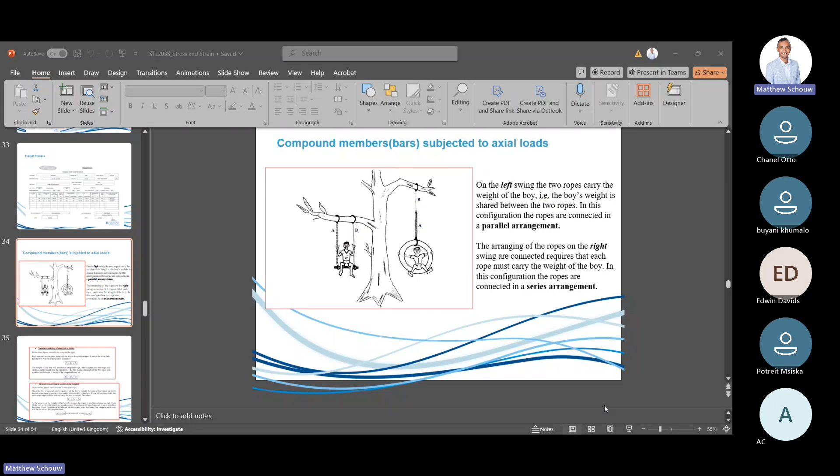There are two types of arrangement, and please, right, these arrangements are of utmost importance. It happens throughout the syllabus of N5 and N6 in different variations. So understanding this parallel and series arrangement is of critical importance, especially when it comes to the strength of materials.

Nevertheless, if you look at the boy on the left there, right, there's two ropes on either end of the boy carrying the boy's weight. And basically with those two ropes, the boy's weight is shared amongst the two. Okay, that is what we deem a parallel arrangement.

Okay, so that's the first thing. Now I'll ask you, what change of length do you think this arrangement will experience in terms of the change of length? Will the change of length differ, or will it be the same?

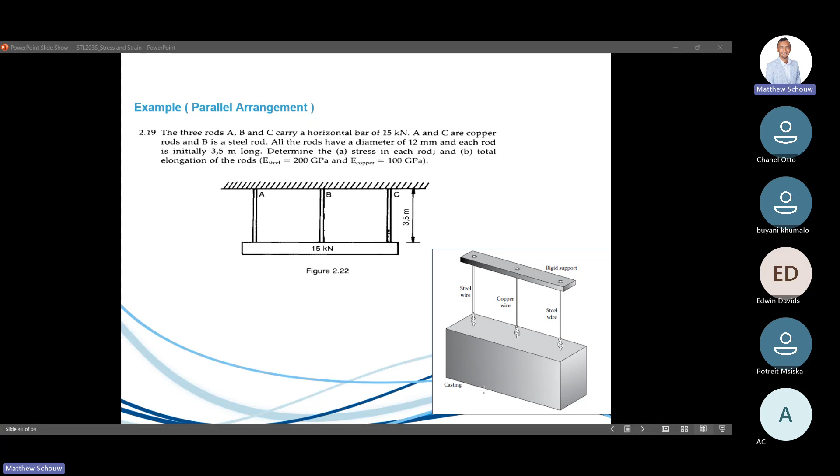I think it would be the same. Yes, and the reason being - I agree with you - if they are all maybe of the same length and they are carrying this, supporting the same load, so they shouldn't be different. Perfect, that's good enough, especially the term of the same length.

So that being said, right, I'm gonna go back to the formula for parallel arrangement - just bear with me going back and forth. You'll notice that they will say here that FA plus FB equals FT. Essentially what it means is that rope and that rope will equal the total force of the boy, which is going down, so FT would actually be the weight of the boy.

And then what you find is that the change of length, assuming they have the same length, will be the same. Very important relationship - you can think of this like your electrical arrangement as well, where your current is the force and the change of length is like the voltage. So in a parallel arrangement, you find the voltage is the same, and then the currents you have to basically add. But obviously this is kind of self-explanatory, and you'll see it as we go along.

The other relationship is a series relationship. Just allow the person in.

Where am I now? Where am I now?

Okay, and that is basically when the ropes are arranged next to each other, or they follow A and B instead of next to each other. And in this case, what they say is that each rope must carry the weight of the boy.

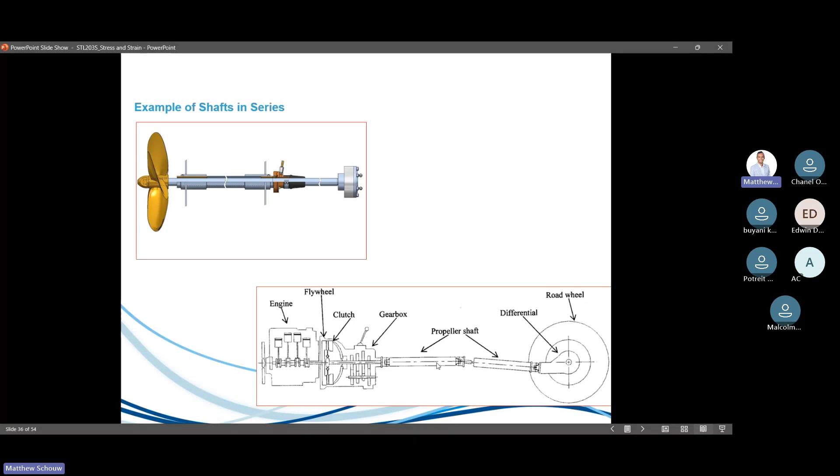I wish you guys could give me some more inspiration on that. So the shaft is like one shaft housed between a part of a bearing, another shaft obviously gets joined. So this shaft is in series. Another example would be over here as well. This is technically in series as well over here. So what we find in the relationship there is...

The forces is all the same. They make an interesting note regarding the forces, and they say if one rope fails, then the boy will fall to the ground. It's quite similar to when you have lights in series, and if the wire breaks, all of them don't receive a current.

And then again over here, which is like the voltage, change in length or strain, they're saying the weight of the boy will stretch the compound rope. That means each rope will require a certain stretch length, right? So there'll be a change in length of this one plus a change in length in that one, which will give you the total change in length of the arrangement. Whereas in this case, the total change in length which this whole assembly experiences is exactly the same.

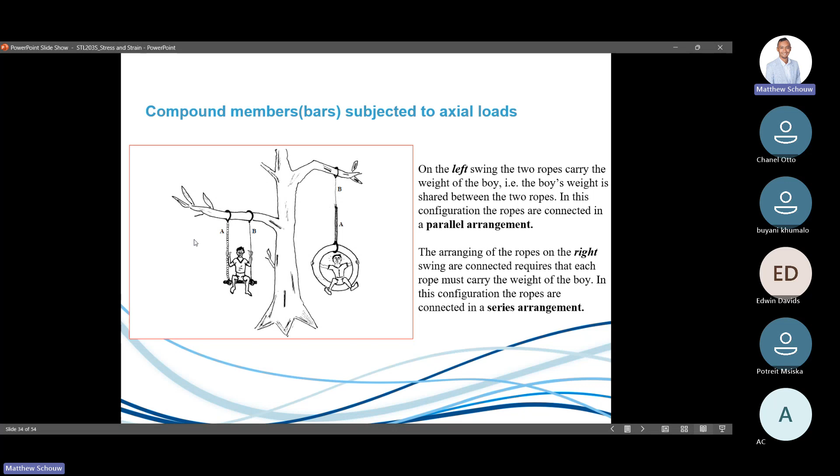Okay, so that's the two main things. I want you to remember this, and I want you to remember this and this. Now,

Obviously, on your guys' book, this is called X, not delta L, but I will be using your conventions when I solve the problems. But as long as the concept is understood.

Okay, is there any questions before I start the first example? Edwin, I'm sure you have one. No, sir, I don't have one. I just need to get to the calculations.

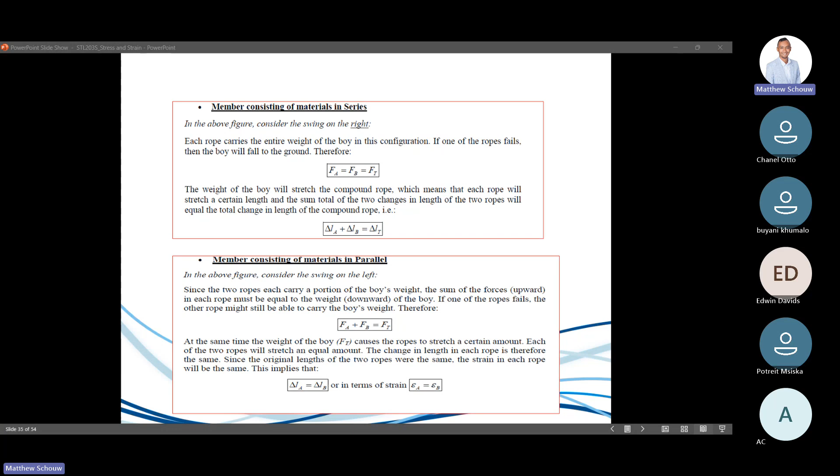Okay, so my whiteboard is being shared. Can you guys see it? No sir. Okay, store this. This is coming from the Vickens textbook. Someone just confirm with me this example is still there.

All right, over here. Can we see it? Yeah, but make it a bit bigger, it's a little bit blurry. Okay, cool, you don't mind? No, it's fine, it's fine.

Okay, so over here, as you can see, it's quite straightforward. You have a series arrangement, right? And it would be useful for us to write our relationships down first. Like I said, in this case, applying a straight 20 kilonewton load. And then what happens here is that F in the first element, the first section, I'm just calling it F1, will be equal to F2, which will be equal to the total force experienced by this. So it's all 20 kilonewtons, all carry 20 kilonewton load.

However, for our extension, it's going to be the sum of all individual ones. You could have called this A or B or whatever, I'm just using 1 and 2. Okay, so X is called extension.

Now, before I solve this problem, I just want to bring up a particular relationship which happens a lot in the text, right? And we didn't actually do it within the example in stress and strain. Do you guys agree with me that the elastic modulus is equal to stress over strain? You guys recall this? Yes?

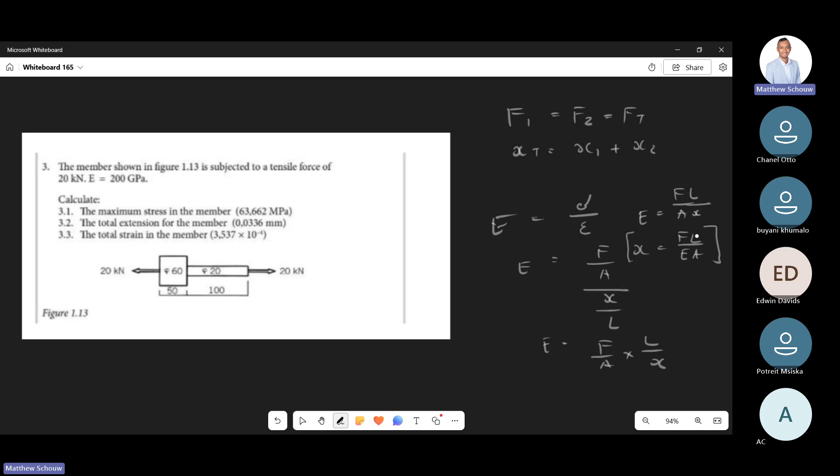Please write it down now. You use this a lot in this type of questions.

So yeah, always, in most times, they're going to ask you to calculate, what is it? The X, yeah, it's an elongation.

And nice to see you, Chad. Yeah, you understand why this is going to be done, man, as I do it. How's it, guys? Yo, yeah, nice that you could join.

You understand? So that one, colleagues, please make a note of it. You didn't even write it down. You understand why as you solve problems. So it's just the manipulation of the formula, putting.

Yeah, this thing is the same thing, this is the same thing. But you want to put it in terms of, what is this thing called? In terms of X, of your extension. Yeah, I can tell you the reasons now.

But sometimes you need, especially with the parallel arrangement, you need ratios between two forces. But you'll see as we do it, man, you'll get to it, you know what I mean? So we have that down. Just to check what's in your formula sheet. Yeah, okay.

Okay, that person's in already. All right, let's quickly begin. So you guys are

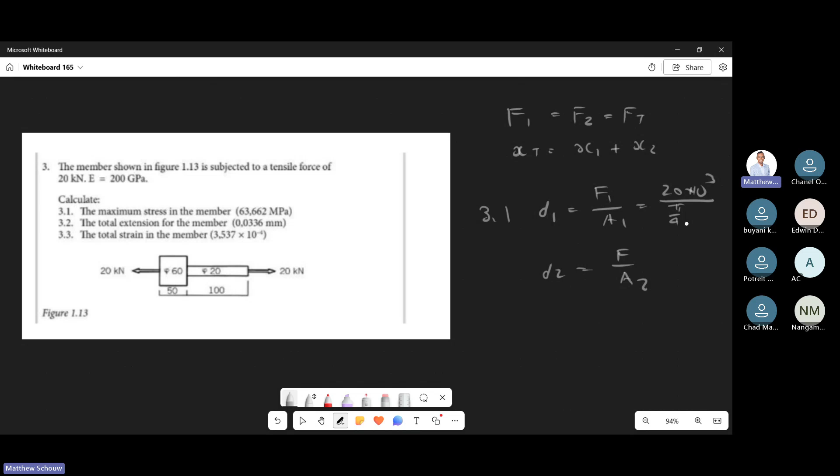The first area, that's pi over 4. Potreit, you can calculate this for us, I'll leave this to you, 0.06 squared. And then the next one we can do again, 20 kilonewton, same thing, but now a smaller area. Okay, and that's 0.02 squared.

Okay, so can we just get that stress 1 and that stress 2? We obviously know the smaller diameter will experience more stress, assuming it's the same material for both. In this case it is, it's some kind of carbon steel or mild steel.

All right, this is a standard calculation, nothing crazy. I've got too many crazy problems I want to solve with you guys, that's why we need the time. But we don't have that time. That's a problem.

63 megapascals, for which one? The first one? You gave me the first one. Oh, you sure this one? No, that's the second one. I'm sorry, 63 point what? The second one is 63,662. Is that correct? We need to have at least 3 decimal places.

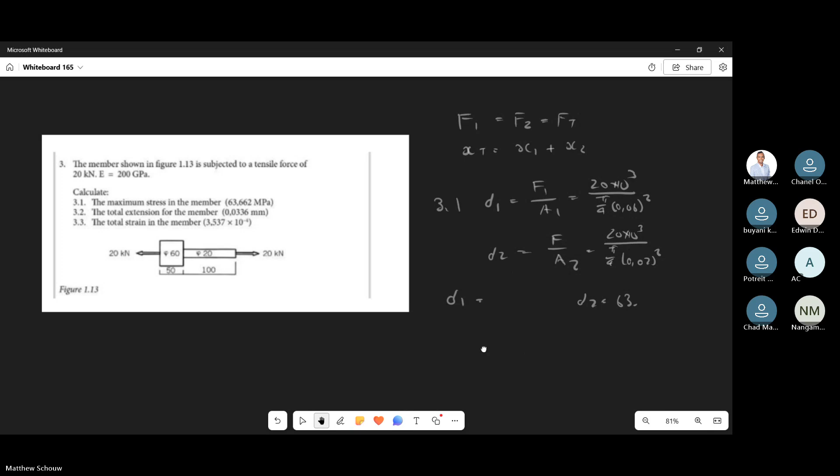Let's see Chanel, who else is there? No, behind is occupied, Ngamso. Give the answer there, let's move guys. Bring it down, I can't hear you. Sorry. Son, you're quite faint.

So the first one is 7,073. 3 or 3, well, make it 4. Okay, perfect. And then the other one is the 63 point something, right? Yes. Okay, perfect, other one is 63,662. Okay, sweet.

So based on these values, we can obviously see that's a bigger stress there, right? And obviously that's the bigger one. I just want to look into the textbook now, quickly show you a case in point of a smaller area experiencing more stress.

I'm not sure if Chad wears heels. You know, you never know nowadays, eh? But I was going to go to Chanel or Nangamso.

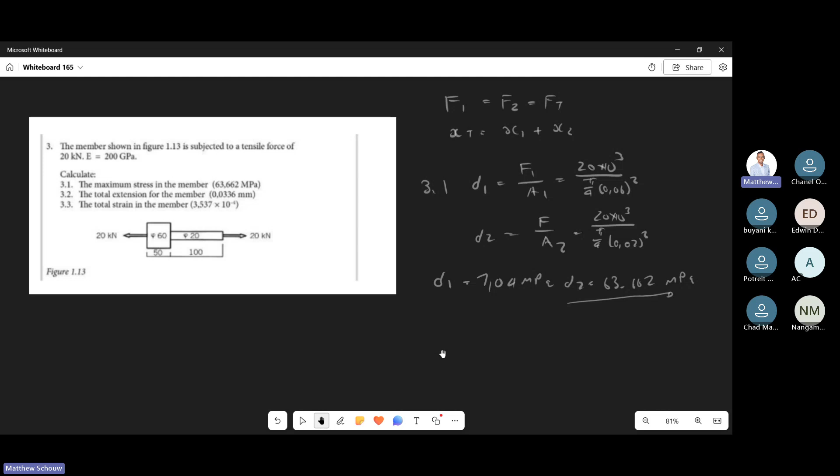I'm not sure. So in terms of smaller areas and bigger areas, this is what I'm talking about. You find out what you experience on that point on your heel, right? This will put a lot more stress in that leg joint as well. Case in point: smaller area, more stress, and bigger area, less stress. Yeah, I don't know if that helps at all.

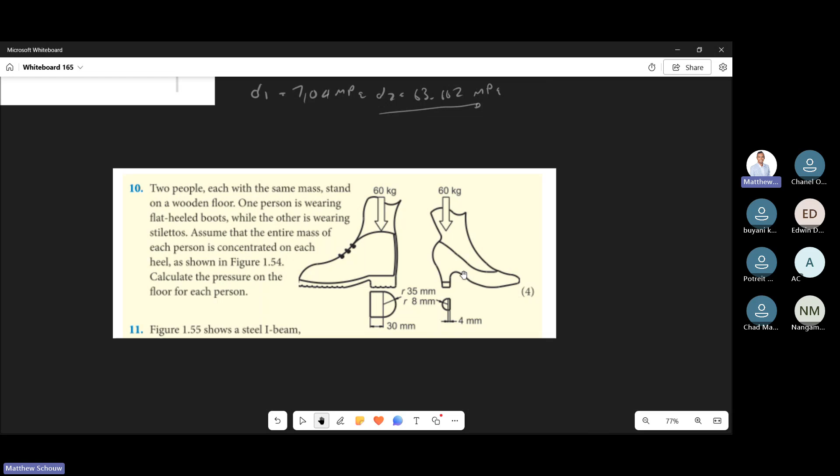Okay, perfect, let's just quickly remove that. Are you guys with me? Yes, sir. Okay, yeah, cool. You get what I'm trying to say with a smaller area and all of that. I know for some people, thought maybe a more soft example. Okay, yeah, the 3.2: bigger the area, less stress, the more the force can be spread. That's essentially the idea, yeah. If you go to stress distribution, that's exactly what you see. That's true, what you say.

Okay, so 3.2, the total extension - I did mention to you the total extension is the sum of all the individual elements, or all the individual pieces here. So all we have to do is use that formula I had, which is FL over EA, plus FL over EA. Now it's nice in this case, our F is the same and our E is the same, so we can take that out as a common factor. We have L over A, plus we have L divided by A. So this will be the first area, first length, and that'll be the second length and second area.

Again, what I want to say is if the modulus of elasticities are not the same, I can't do this, you know what I mean? But the force is always the same, so I'm just making you aware. So we're just taking that as a common factor. So that's 200 kilonewton - but 20 kilonewton, all right. E is at 200 gigapascals. I hope you guys are following me here now.

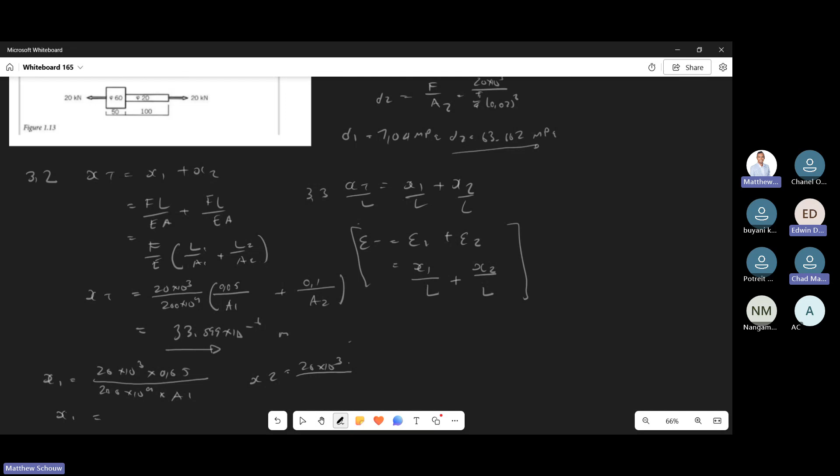So that's 0.1 times 200 times A2. Okay.

Hopefully there'll be good news. Maybe I'll see you guys sometime on campus as well. Eddie did mention that, and I will have time.

So yeah, while you guys are working out those 2 elongations there, are you guys with me what I'm doing? The concept, but if you don't get the concept, that's my main concern. The maths, you will get eventually. Yeah, understand, okay, thank you very much.

The first one is 14.180. Okay, 14.1, yeah, times 10 to the power something. It must be 10 to the power minus 6. Okay, yeah. So that means this one must be 33 minus that one will give me that one over there. That's in meters.

We're expecting around how much? Is there 29? No, 29? 19, sorry, around 19 odd.

Important, remember the promises you made to your family of buying a new house. This is the time, time to work. You remember it when the time you're going to buy a wife a new car. This is the time.

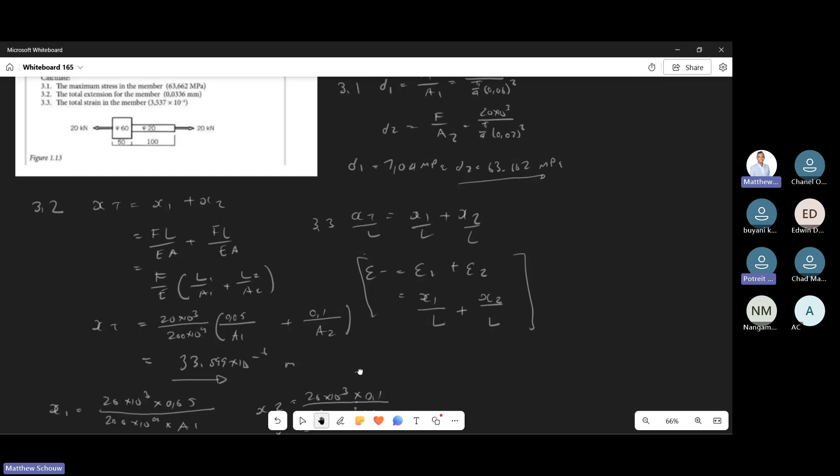0.00353677 meters. For what one is this for? For X2 or for what? I don't know, that is the total strain. For 3.3, that's correct, that's correct.

You got it there, yeah. We're just working on the second elongation with areas, thrust issues. That is why we're here. Okay, Eddie, what did you get for that one?

It should be 19 something, no? Why did I get 1.2? Hold on, did I do something wrong? Yes, I did, just check. Yeah, was I working out so much?

Are we working out the final answer now? No, yes, you're working on the second extension by itself, man, because you wanted to see that, you know. I don't want to spend time with this.

I got 3,183 times 10 to the minus 5. Is that for the second one? No, I got 19.35, it must be 19 because 19 plus 14 gives you a total of 33. You know what I'm trying to say to you? That's a total elongation, so say alpha B.

19.635, sir, that's for X2. Yeah, I think I messed up with something, eh? What did I mess up with? 0.1, is my area not right? I can say I'm also getting this 30 odd nonsense. What did I do wrong? It's probably my area I did wrong.

Yeah, remember your length is 0.1 and the area is what, 0.02? What's this wavy now? Yeah, that's correct, that's correct, the smaller one, yeah. Let me just do that again. Yeah, so it's 19 point something, yeah, for sure.

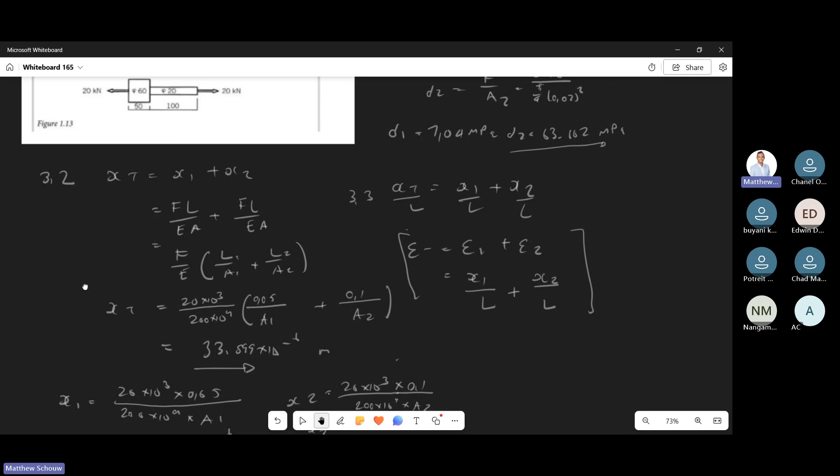Okay, cool. So it's 19 point something, I don't know, -6. We'll just make sure, just check your stuff properly there. Yeah, it should be 19 because remember this 19 plus 14 must give you a total of 33. You know what I mean? Those two must sum up to that. To make sure, yeah.

Okay, only just minus from one another. So no, you can do that, yeah. I'm just, you can do that, but why am I not getting this 19, man? What am I typing wrong here? It's not getting it. Yeah, it's 20

times I'm getting 31. That means this is not 14 on this side here. This is 31 on this side here. This would carry, so this side here I also got 31. Yeah, so this side here. Who gave me that 14 answer? You must take his qualification away.

Oh flip, man. No, that's me, man. How did I not get it wrong? 31 point, this is 31.83, right? This is definitely right. I checked this. I checked it. Must be right. Then I'm going to the other one quickly.

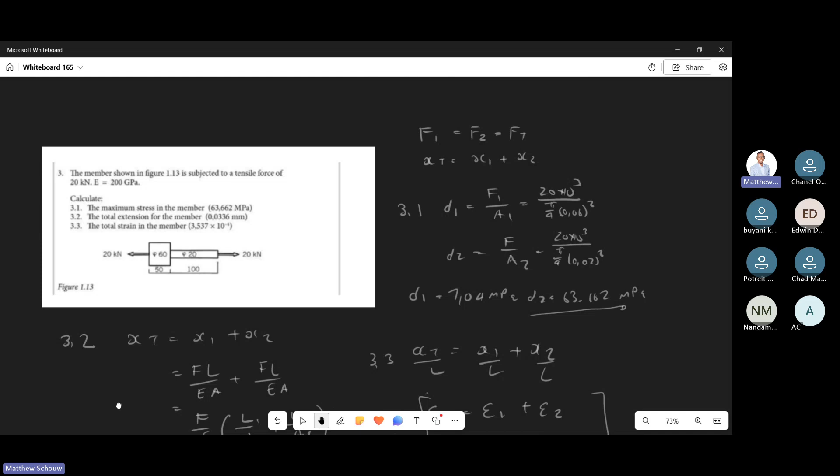No man, what are we doing? Am I tripping here or what? Sorry for my language, let me just quickly check. So 50 mil on top. I'm doing the first one, yeah, the first one. No, I don't know what you're doing, man. This is gonna be 1.7.

Yes, this is 1.768. Yeah, yes, that's what I got also. Yeah, this is correct, for sure. So if you add this two up, this makes sense - I can tell you why, because remember there'll be more strain on this guy anyway if you look at it properly. The change in length should be more here, it's a smaller section compared to this one - that's a more solid one. So if you add them up, you should get that. Yeah, so this is correct now.

So if you want to find the strain of this, you just divide by the length, no? I'm not going to still get into that, that is taking too much time. Okay, cool. Okay, are we happy with this? If you're not happy, you must talk now, but you need to move. I'm not happy, but my calculator's not working with me at the moment. Okay, we must just come back to us. Now,

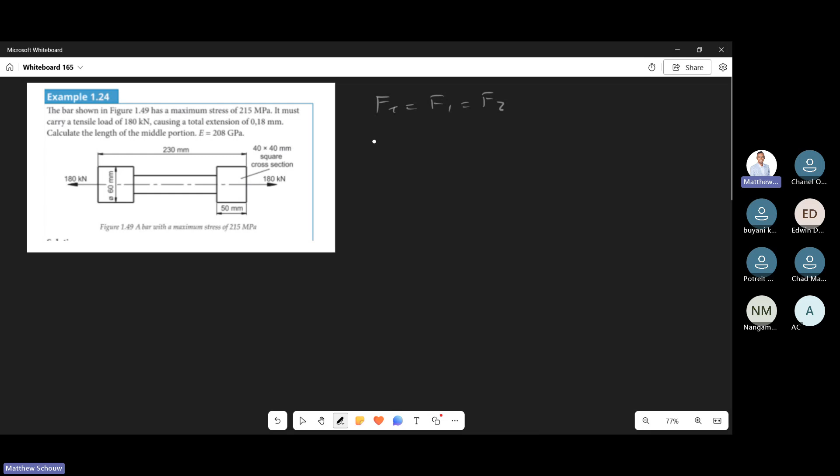All right, so again, you can obviously see what a series arrangement looks like. Best thing to start off with is F total is F1, they're all the same. Then your lengths, we sum them all up, or we can say F3. Okay. Yeah, okay, cool. So it's all the same material, perfect.

So they're saying here the bar shown has a maximum stress of 215 megapascals. What's nice about that in the practical realm is it tells you what material this basically is. So let's say this could have been some kind of aluminium - you actually machine aluminium, but anyway, that's giving you what material it basically is. It tells you it's going to carry a tensile load of 180 kilonewtons and gives you the total extension of 0.18 millimeters. So XT is given as 0.18 millimeters, right? Or 0.18 times 10 to the power negative 3 meters.

Okay, what's happening here? We have to calculate the length of the middle portion. We don't unfortunately know that. Okay, what else do we perhaps know? Okay, so let's quickly try to tackle this. So if we have the maximum stress of the whole bar, right? That means it's the same material essentially. Is there a way for us to calculate the force in any of these members?

I'm asking you guys, the maximum stress will be in the smallest part. Yes, but remember this is a series arrangement. So what does it mean in terms of the force? The maximum stress is there, right? You're correct, but...

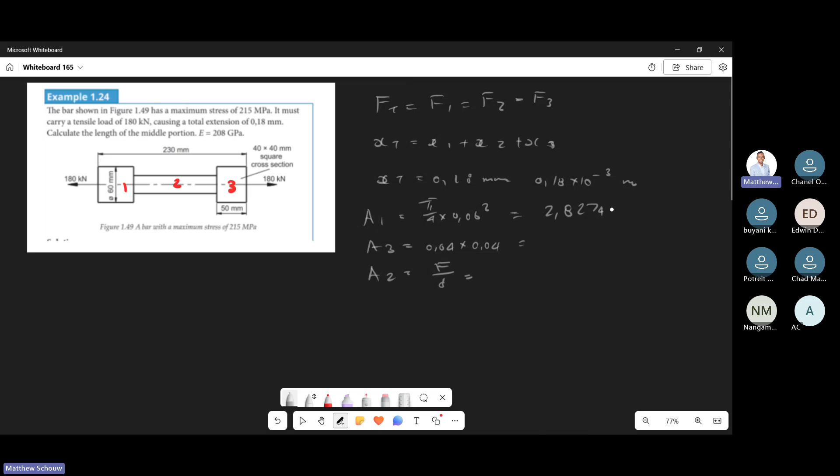Okay, I'm waiting on the areas. I believe my first area should be 2,827 times 10 to the minus 3, meter squared. 100%, yep. The third one is 1,6 times 10 to the minus 3, correct. That's right, the third one. Okay, give me a moment quickly, I'm coming now, you can just work it out.

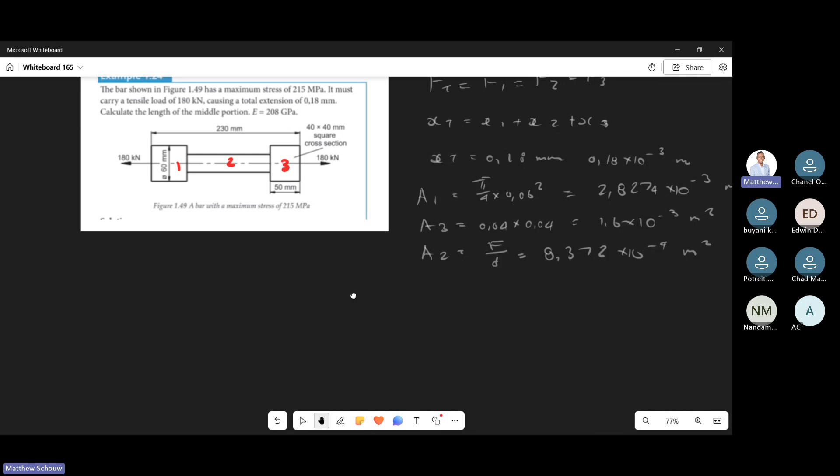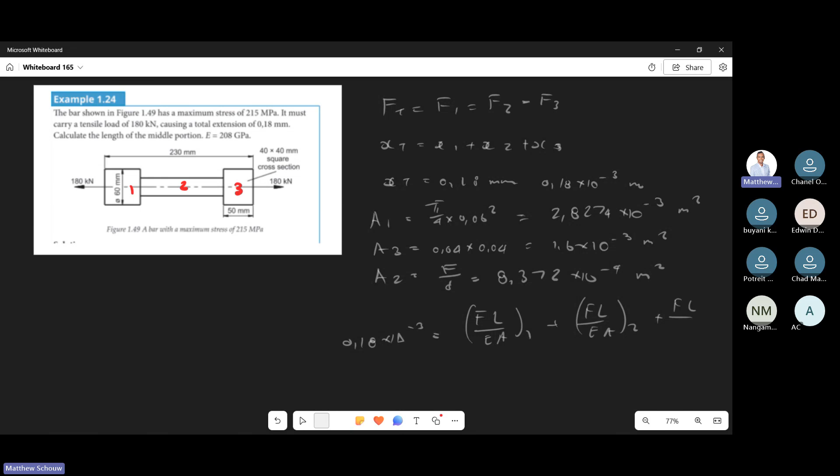Like this. Right, here we have FL over A number 2 plus FL over A number 3. Okay, so now do you agree with me? I can take out F and I can take out E as a common factor. It's the same, right, same material. Do you guys agree with me? L over A1, are you guys happy with that?

Yes. Perfect, okay, so now let me just put in those values for you so you can see. This was 180 on top. And then your E at the bottom is how much? 209, I think, no? 208, sorry, 208.

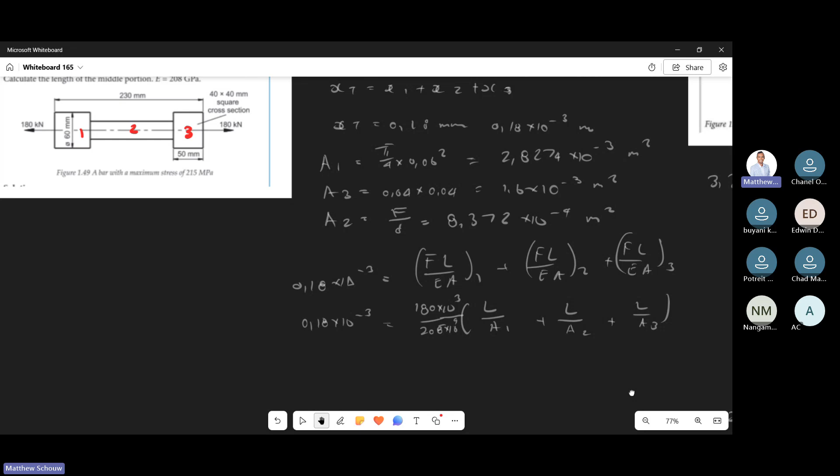Okay, perfect, so now all our areas are there. But now let's look at our lengths. Okay, let's just park over here. You agree with me, we have length number 3, right? Are we all happy with that? L3 is going to be 50 mil. Are we all content with that?

Are we content? Okay, yes, but the problem is L1 and L2, we don't know them. Remember, the question is about the length of the middle portion. So what are we going to do? This is now again a mathematical type setup.

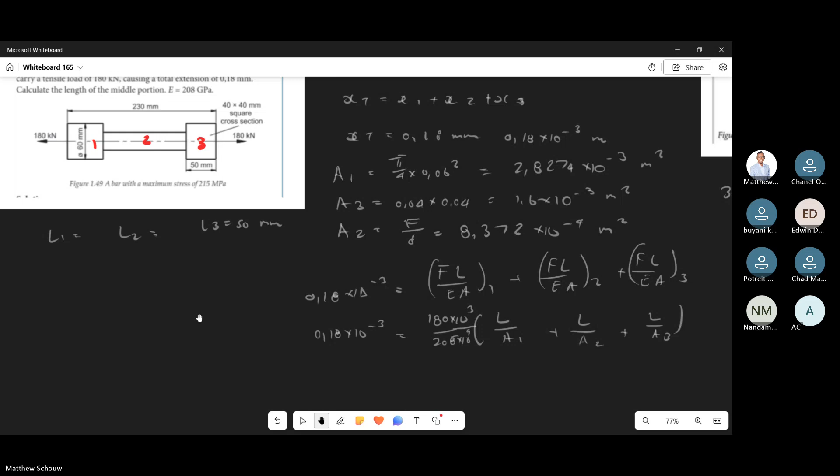We're going to call this guy here L1, or let me just call it L. So we know that the total L, length 1 plus length 2 plus length 3, we know the total L is 230. Are you all happy with that?

Length 1 we don't know, length 2 we don't know, and we know that length 3 is 50. Are you happy with that? Are we all on the same page? Yeah, so if we subtract that, we should get 180 equals L1 plus L2.

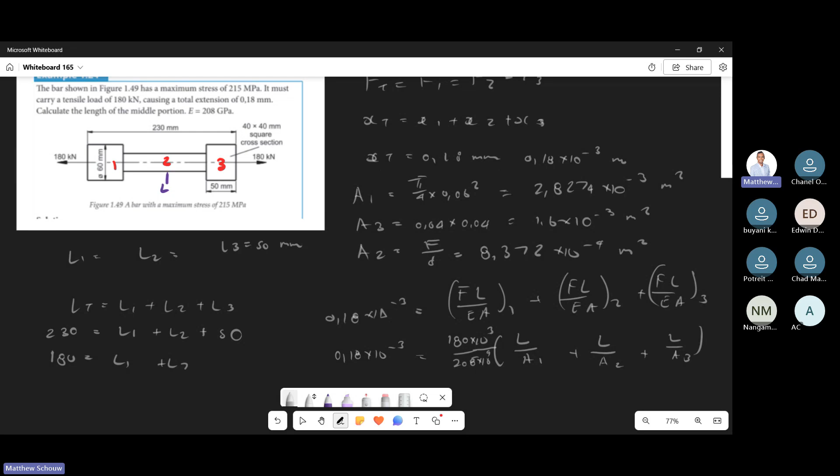So what's nice about this is that all we must do, L3 we have already, that's 50 mil. L2 we don't know, but now we must decide, we need L2, so I think L2 should be the subject of the formula. So therefore we probably need L1. We're gonna say 180 minus L2, and therefore we have L1. So this will come in over here, because that's L1, and L2 will be our only unknown in the equation.

Let me write it out for you. I don't like this problem, it takes too much time. Anyway, so L1 is 180 minus L2, you divide that by area 1, which you've worked out. L2, we're looking for. And L3 is already given, that's 50 mil, so that's 0.05 divided by A3. Just can move it, board. And all we need to now do is solve for L2.

Is everyone on the same page on what I have to do with the lengths now? That's the important part here. So I'll say this again: that's L1 plus L2 plus L3. L3 is given as 50, our total is 230. Are we all happy with that?

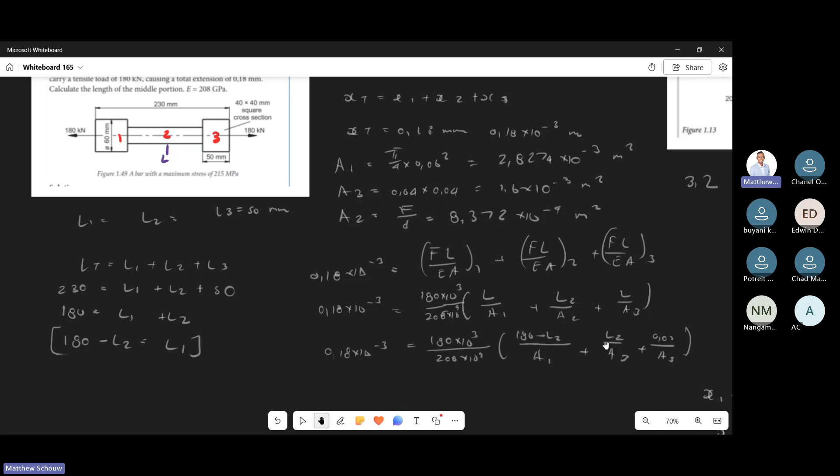Okay, so this is quick to do. You're going to say 0.18, and you're going to divide this by 180 over the 208. Perfect. And then you're going to end up with 180 minus L2 over A1, plus L2 over A2, plus 0.05 over A3. In fact, this is also going to give us a number.

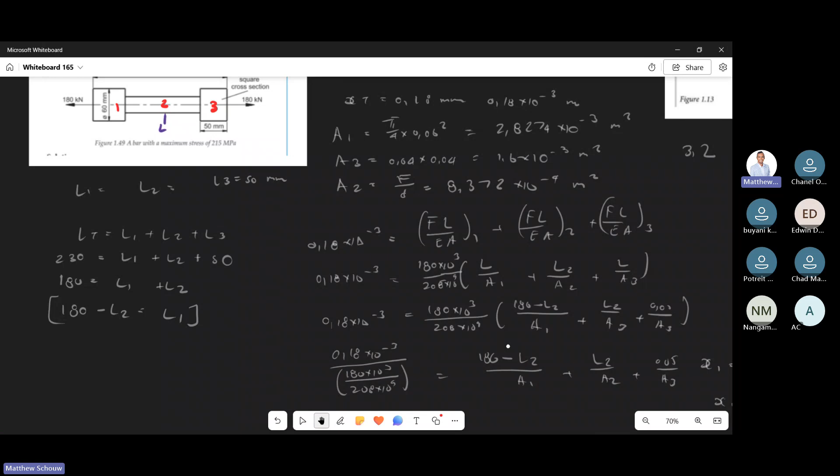You can take this guy and actually throw him over to the other side. But anyway, let's see what you get. What do you get for this piece over here, this thing over here? I'm spending too much time with maths here, it's really simple.

Gamso, are you there? Yes, I'm still working it out. Okay, good.

So I just want this value, and then this value can also work out, you know what I mean? You can take that value over to the other side. So in the end, we're basically going to have whatever this is, minus 0.05 divided by area 3, which is 8.372.

I don't know what that value is. I got 200 for that value, sir. This one over here, this whole thing here, no? 200? Yes sir, exactly 200. Yes sir, not the 2. I think there's a 208 here, no? Just make sure. Oh, 208, yeah, 208 here. So it's 208, right? Okay perfect. Oh, I thought it's 200, sir. Yeah, it's my bad, it's my handwriting, don't trust my handwriting.

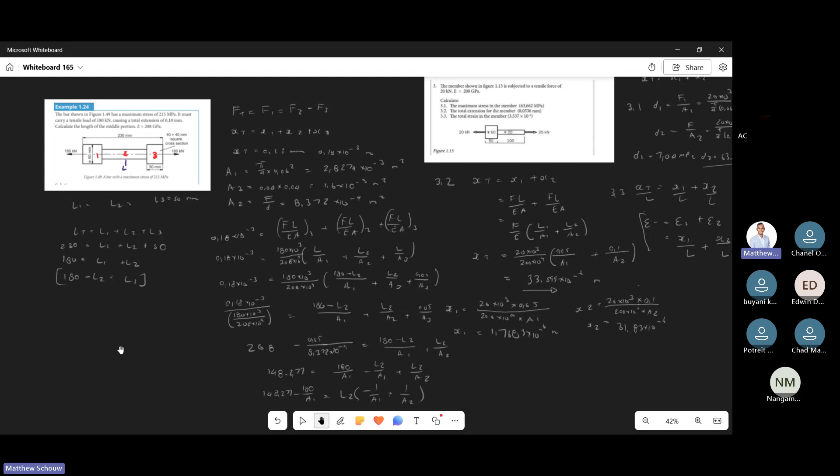Let's quickly move on to parallel. Okay. Where am I now? Okay, so this is coming from the Du Toit textbook. It's another question there, and we are looking at the parallel arrangement.

Okay, just want to move this on the side now. Okay, cannot move you. Delete. Paste. Okay, here we go. Oh.

Perfect. Okay, so the Du Toit textbook, it's there. I want us to do one more after this, and then we're basically done. All right, so same logic applies here, but it's a different case now.

And hint, nudge nudge for your upcoming test, make sure you're able to do the parallel arrangement. I'll not say that again.

Okay, so yeah, this is a more common arrangement in the industry. I mean, we can look at cables, for instance. I can give you an example.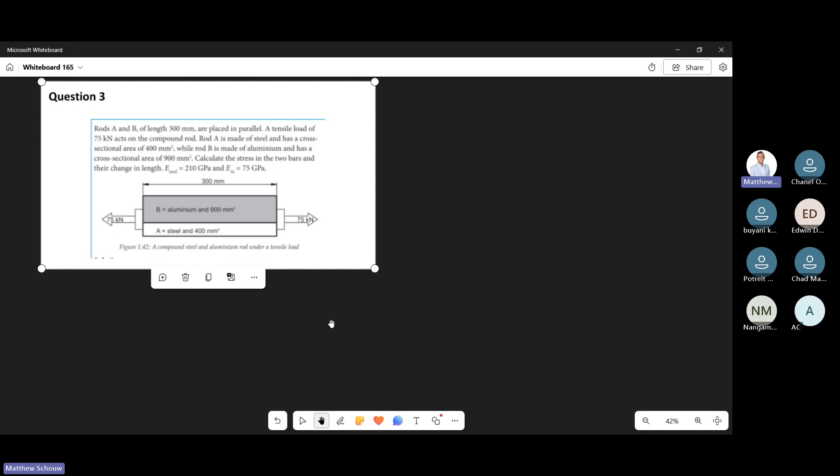That's an example of that case. But in this particular example, we've got some rods, meaning they could have cylindrical cross sections. We have rod A and rod B. They gave us the cross sections already, we have to work it out. What they basically want is a stress in each bar, and then they also want the change in length. Remember, the change in length is the same for all.

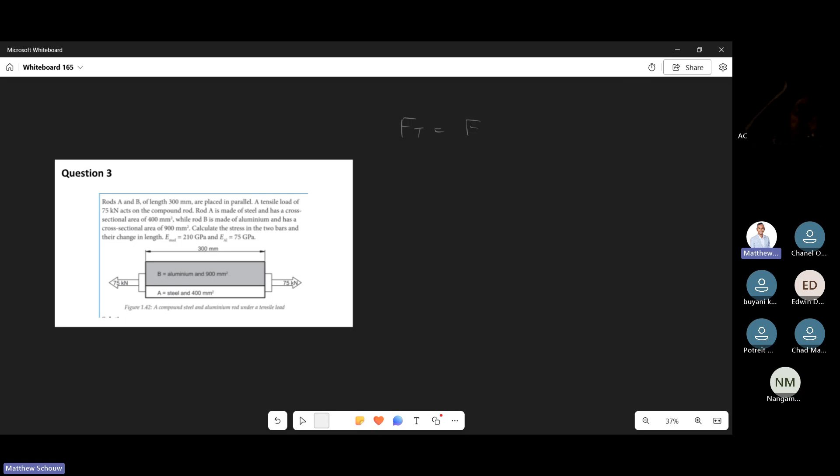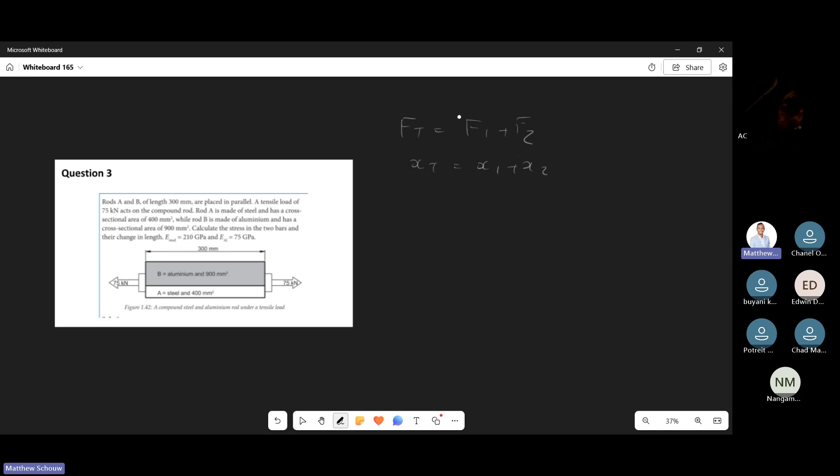So our total force is split up into F1 plus F2. That 75 kilonewton is distributed between the two rods. However, we do not know which one carries more load than the other. That is what we're going to find. Our total change in length, assuming they have the same length, is X total equals X1 plus X2. Always start with your main formulas first. Are we all on the same page?

Are we here, colleagues? Yes, sir. Okay, you guys tired? Trying to follow. Okay, I want you to be here, I mean, must be present. Are we all happy with the arrangements, in terms of what's happening there? Okay, that's very important.

I don't know if anyone can give me a possible example of this, where they've seen two different materials or something carrying two different loading types like this. Happens a lot, man.

Nevertheless, let's quickly work this out. So what you're going to have to do, this is a very standard approach for parallel arrangements. It always kind of goes with a similar flavor. So I want you to predict now, looking at this arrangement. It's carrying 75 kilonewtons. Which one will have the most stress?

Can someone tell me which rod will have the most stress? Anyone? I would say the steel because the area is smaller, but also the properties of the material could matter. So it's good, steel be more. So I say A is 1 for A. Anyone else? That's perfectly fine.

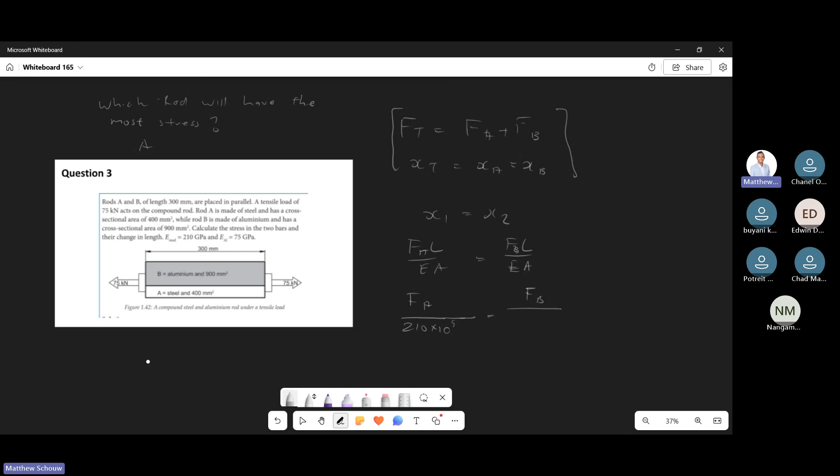FB, and then 210, and then we times by the first area. The first area, can anyone convert? Who knows how to convert millimeter squared to meter squared? Okay, divide by 1,000. Can I show you a slicker way? Not divide by 1,000, it's a bit childish, man.

You got a better way? Anyone? I show divide by 1,000. You call me divide by 1,000. Remember, it's millimeter squared now. Chad.

Who can tell me the engineering notation for millimeters? Like times 10 to the power what? You know that kind of thing. 3? Not 3. Oh, not negative 3. 6? Negative how much? No, you're guessing now. You're in the right realm. I think it's times 10 to the power 6.

It's negative. Okay, let me show you now. So 400, right? And millimeter is basically 1 times 10 to the power negative 3. You guys agree with me here, right? You put a square there, 400, you apply laws of exponents on there, and then it becomes minus 3 times 2, right? So to get it in meters, that's all you basically have to do. So this is in meters. The 400 millimeter squared is basically 400 times 10 to the power negative 6 meters squared. Are you guys with me?

Got you? Yeah, it's just, I'm teaching you some other stuff as well while I'm, instead of dividing by all that, it's just, so just remember this, right? So it's times 10 to the negative 6 meters, basically. So I just want to make some space here. You go in the 400.

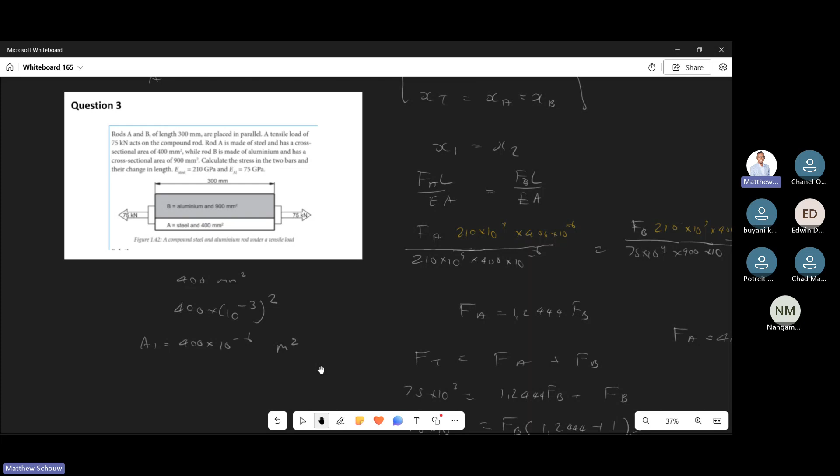Yes sir. Okay, sure. And then what we need to do now is to calculate the stress in the two bars. And guys, do you remember our old faithful relationship? It's going to be FA divided by AA. Stress over here, it's going to be FB divided by AB.

So first, FA was 41. So now we can see if Chad's theory was right. And our first area was how much again? Was that 400 A day? Times 10 to the negative 6. We get our answer there. And we have our F.

This is going to be 33.416 times 10 to the power 3, and that's divided by 900. Okay, and then we can get those stresses for both.

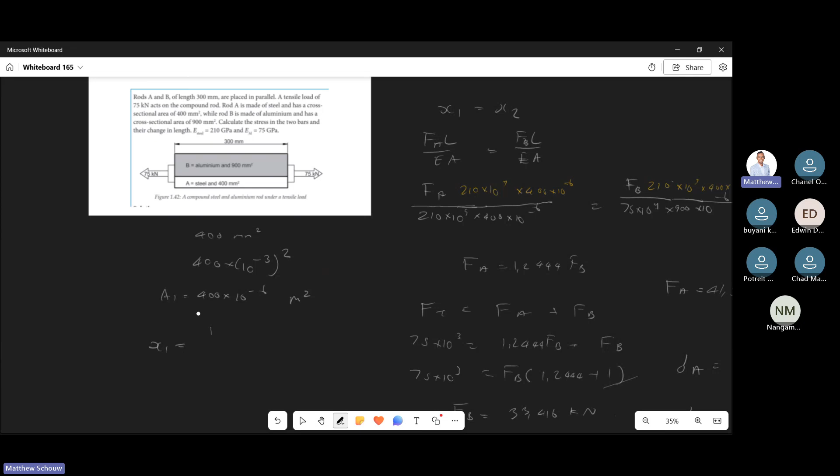So I'll just hold it, I want to just do it over here so you guys can actually still see. So I'm just going to say X1, which will also be equal to X2, by the way, also equal to the total. So it'll be FA - FA was what again?

33.416 times 10 to the power 3. Its length was how much? 0.3, 300 mm, size of a ruler.

And then we're dividing it by E. E for steel is different, that's 210, right? And we times by area 1, and area 1 was 400.

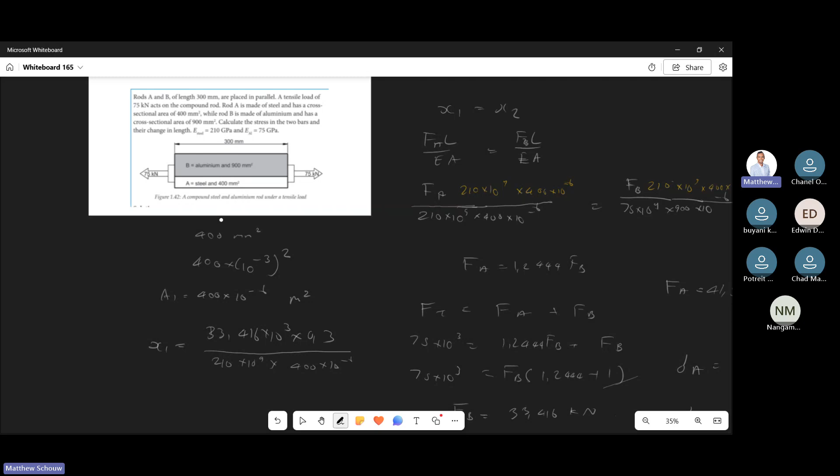So just to be clear, colleagues, you could have done this either for the aluminium or the steel. In my confusion too, aluminium or the steel, as long as you keep those values consistent, you would have been fine. So then if you get your extension, you can just quickly work it out.

It should be exactly the same on either side. Let me look for a quick one for you on my phone. Extension for me.

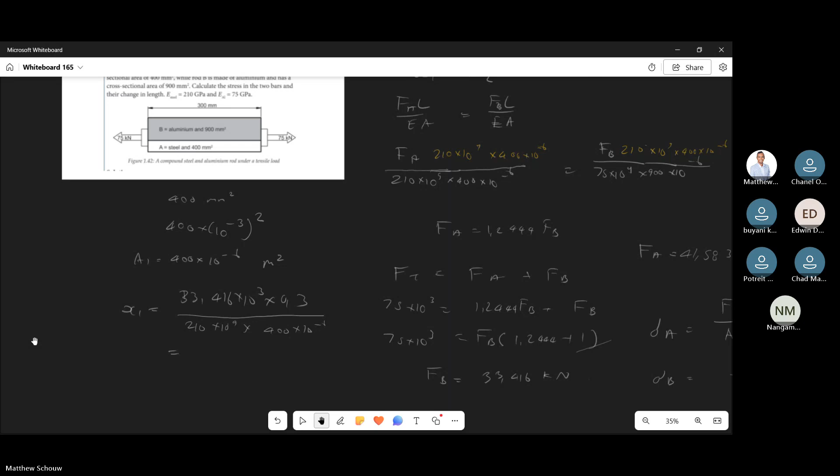Okay, we see here. This is also series type. That one is there. Okay, I'm waiting on you guys, eh? That one. Okay, so what is my extension over there? You got it?

I got 1,193 times 10 to the power of -4. Let me just confirm that answer. 1, say it again. 1,193 times 10 to the power of -4. Are you sure about that one?

I don't get that one. It's not that one. Let me just check, so it's 33, right? That's the first force, am I correct? No, I made a mistake, eh? I'm using FB here. They said the aluminium force. This should have been FA, right? Are you guys with me?

This is supposed to be on the steel side. The steel's force was how much again? Sorry about that, the steel's force was 41. I'll just change your value there. 41.584. Are you with me? This is the steel side, this is A. Are you with me? That's A. That's the first one, can you just quickly redo that for me?

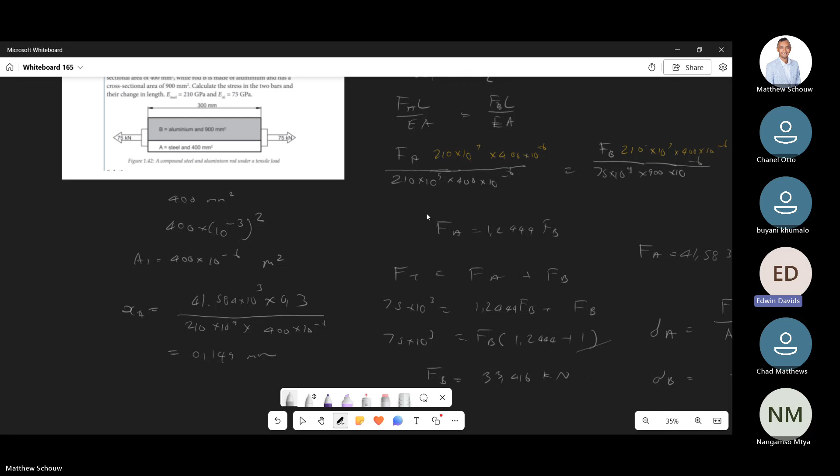Yeah, go for it. Sorry, do you still have the series one we did on - say that again. What did you say, was it gone? You still have the series calculation we did on your whiteboard? Series one, yeah, it's all here, it's not gone, nothing is gone. Sorry, I just want to go.